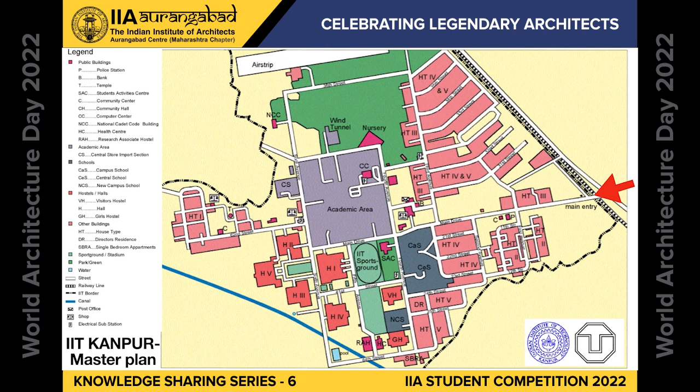In the center there is an academic area and school along with green patches. Though the residences are near the road, this has been kept separate from the academic block, as students require silence and peace in their educational domain.

The site is bifurcated into 3 sections. Purple color depicts roads, yellow hatch shows the students' accommodations and its traffic flow towards the academic area, and blue color indicates the academic staff residences. This segregation is done to create a different environment for the users of the campus.

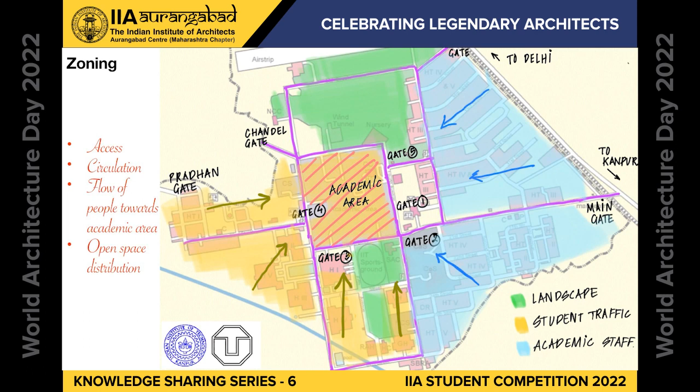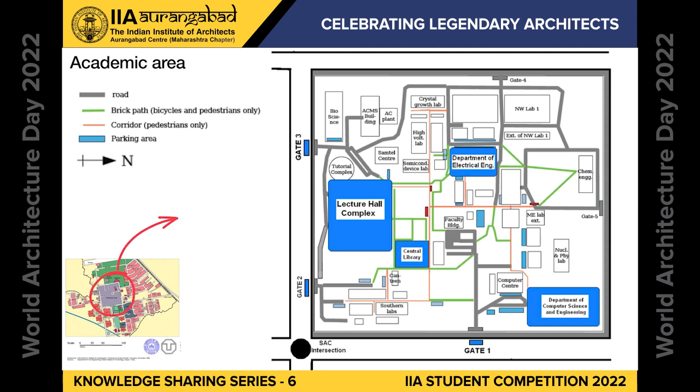This is the detail of the academic area, wherein all the different department blocks are placed diversely as per functions. You can witness the road network for cars and their parking allotment near the structures, keeping in mind the barrier-free design. The pedestrian pathways and corridors are not cut off by the roads, hence limiting threats.

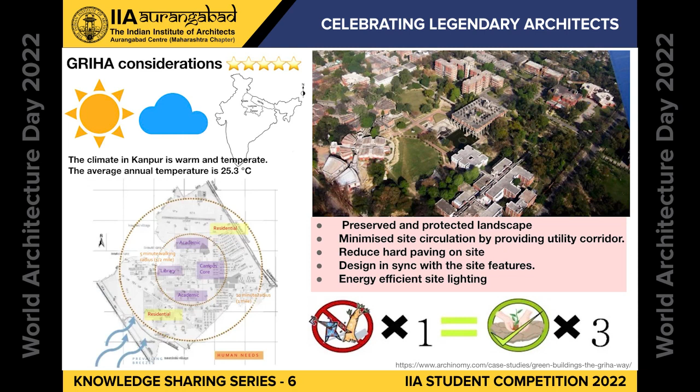The passive architecture features are followed by IIT Kanpur in the path of GRIHA. The climatic zone of Kanpur is warm and temperate. Hence, he optimized orientation and architectural design to maximize comfort by reducing hard paving on the site and minimizing site circulation to a 10-minute walking radius by providing corridors instead of exposing humans to the sun.

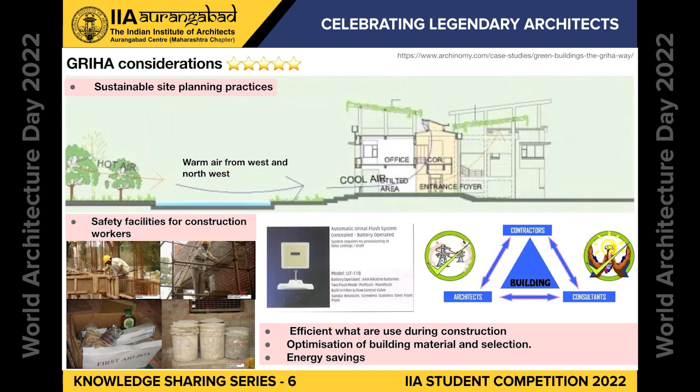He drew attention to the safety of the workers and refined material selection and openings on the building. As Kanpur's wind comes from the west and north west, the openings and water bodies are directed accordingly to lower the temperature. This cool air then passes through the internal corridor and escapes out from the ventilator, making a habitable environment. Also, energy savers are used throughout the campus, such as efficient light and sanitary fixtures.

Focus was placed on shading devices and various window openings to provide daylight engagement as per the north-south orientation of the building. Also, rainwater harvesting and soil erosion were dealt with by him, hence fulfilling the sustainability principle.

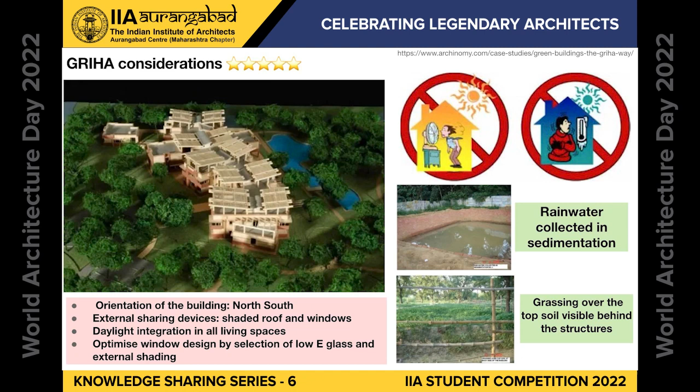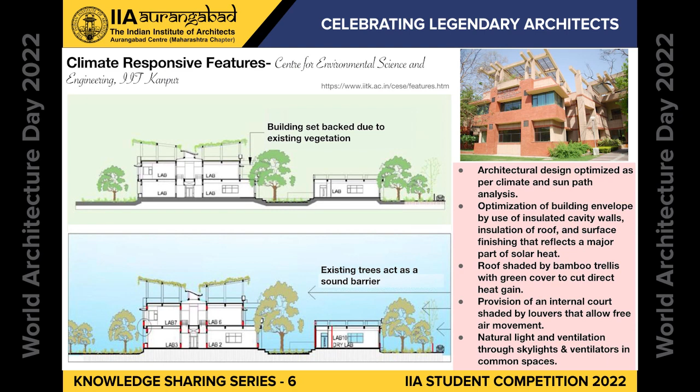As Kanvinde sir retained vegetation on the site, he incorporated the physical features into the buildings by setting back the first floor in response to the existing tree, and this tree acts as a natural sound barrier.

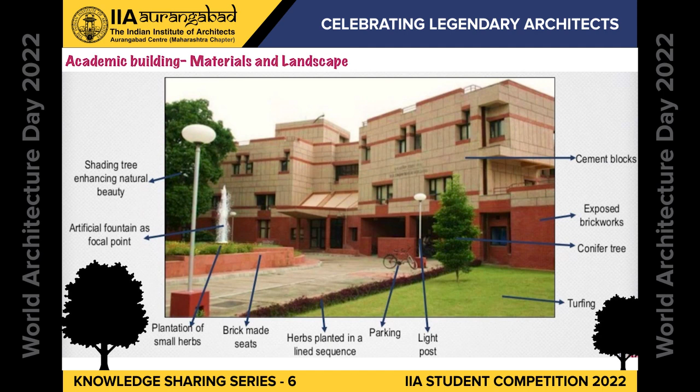He used cement and sandstone for the floors of the pavement and surrounded the pedestrian corridors with trees of high visual weight. We can demonstrate the focal point of the academic building, which is the fountain, with other landscape elements that complement the elevation of the cement blocks and exposed brickwork as materials.

The pathways are elevated and covered, connected to each floor of the departments to give an inside-out feeling to the user. To summarize the landscape details, nearly 60,000 trees are on the site, and there is a checklist of all the materials and hardscape elements used in IIT Kanpur, which include sculptures, water bodies, sitting places, etc. The takeaway points are spelled out here.

The campus has been beautifully designed with sustainable features and merges with the natural environment. The main focus of the campus is the central pedestrian island, surrounded by lush greenery and a huge water body. Efficient zoning of buildings is achieved for easy and quick circulation and for better interaction. These are the appraisals of users who visited the area, which show a 5-star rating.

Kanvinde's career spanned a period of about 50 years. The three highlighting orbits say that he advocated asymmetry, as he believed the form and space of a building should be a result of the interior space, and gave utmost importance to natural light, making sure his designs were naturally ventilated. Lastly, there is a strong presence of simplicity in facade treatment and elimination of unnecessary elements. Thank you and have a good day.

Achyut Kanvinde, a functionalist, was an Indian architect known for adding elements of brutalism to his buildings. He was a pioneer of modern architecture. His designs experimented with simple geometrical shapes that imbibed fluidity, giving the building a voice. He was born in 1916 in Achara, Maharashtra.

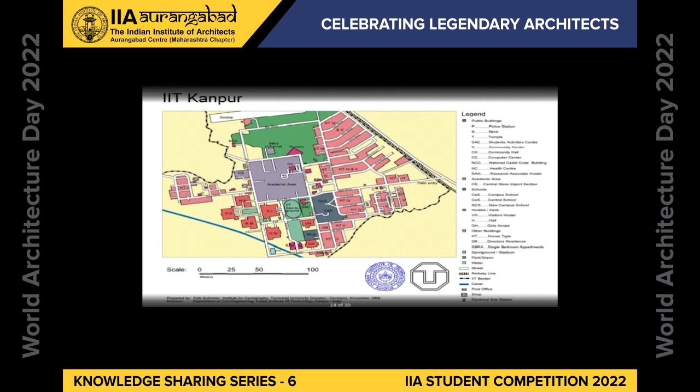The IIT Kanpur campus occupies a 1,055-acre area. The academic complex is located centrally at the site and free from traffic noise. The site is flat with a canal on one side and a transportation route on the other side.

The residential campus is planned and landscaped with the hope of environmental freedom. Halls of residence, faculty and staff houses, and community buildings surround the central academic area to provide flexibility in movement and communication, taking into consideration that research work today is a collaborative work of disciplines. The curriculum of studies is worked out with that goal in mind.

The Bauhaus influence in Kanvinde's style is clearly visible in the buildings of IIT Kanpur: cubic shapes, smooth flat plane undecorated surfaces, complete elimination of all moldings and ornament, flat roofs. This reveals the internal functions of a building as separate masses arranged in a way that was functional from inside and elegant from outside. Kanvinde strongly believed that the elevation of a structure should be defined by the functions inside.

In conclusion, his works are generally raw and unemotional, yet he managed to make his designs appealing and welcoming. His designs were distinct and unique, yet having one thing similar: functionalism. A large amount of thought was given to making them functionally efficient and practically feasible. Conventional buildings were designed as isolated islands of departments, but activities shared by students and faculty were designed to encourage meeting and interaction.

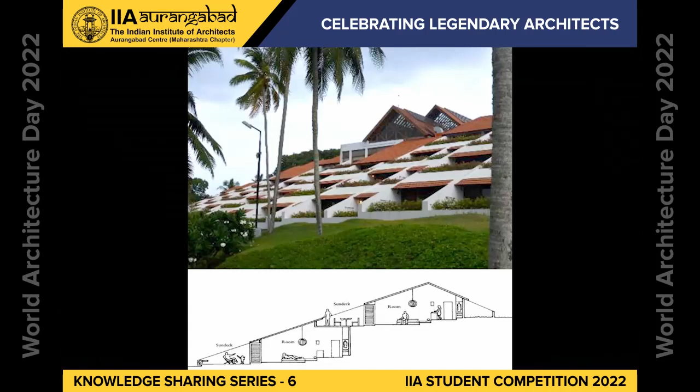Correa began his work as an urban planner in the late 1960s, designing New Bombay. Even though he was schooled in the West, he was not interested in international style and modernism.

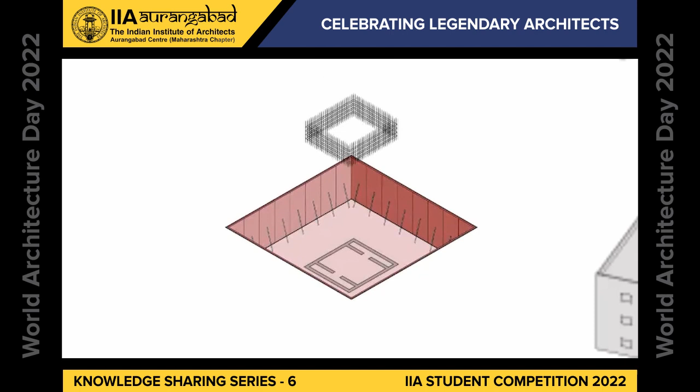Coming back to the video - by developing climatic solutions for different sites and programs, architect Charles Correa designed the Kanchenjunga apartment located in Mumbai. The Kanchenjunga apartment was a direct response to the present culture, the escalating urbanization and the climatic condition of the region. The building is a 28-story reinforced concrete structure with 6.3 meter cantilever open terraces.

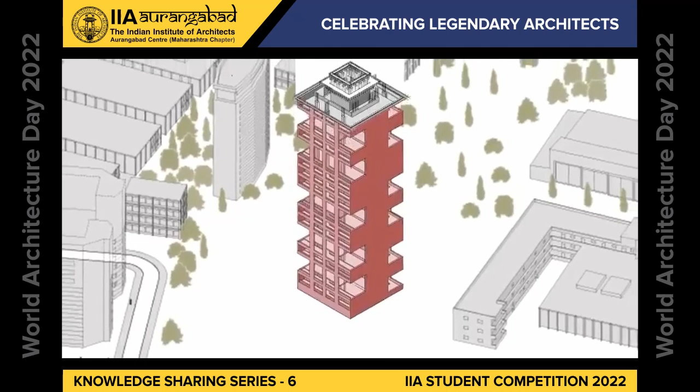In Mumbai, buildings have to be oriented east-west to catch prevailing sea breezes and to open up the best views of the city. The central core is composed of lifts and provides the main structural element for resisting lateral loads. The central core was constructed ahead of the main structure by the slip method of construction, a technique used for the first time in India for a multi-storied building.

The garden terraces of the Kanchenjunga apartment are actually a modern interpretation of a feature of the traditional Indian bungalow, the veranda. Charles Correa mainly worked on sectional displacement by bringing changes in the floor surfaces. He applied cellular planning using interlocked 1.5 story, 3 and 4 bedroom units with 2.5 story, 5 and 6 bedroom units, giving views different from one another, some an inspiration to its residents.

The stories, the silence when the city sleeps, the noise, the breeze - the Kanchenjunga apartment, rather than being just a structure, is an experience within itself.

As a student of architecture, we understand how he implemented traditional architectural elements and how we can project that in our future designs. His deep analysis of climate statistics helps us understand how to deal with climate-responsive architecture. What makes his design more special is his idea of giving open-to-sky elements in the building for reduction of heat waves entering it.

The 7 principles of Charles Correa are: open to sky spaces, incrementality, pluralism, participation, equity, and disaggregation. Highly climatic responsive buildings cater to socio-economic needs ranging from low-income, high-density housing to entire townships. He paid special attention to air ventilation to provide good human living environments.

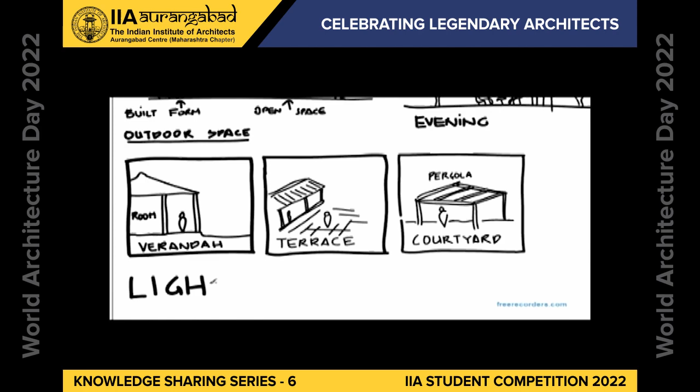Due to the high population of Mumbai, he designed low-cost houses. He designed buildings that were used by a wide variety of the public - people of different caste, religion, rich or poor.

Charles went on to create a lot of beautiful projects in his lifetime: the Inter-University Centre for Astronomy and Astrophysics, and the British Council. And not just in India, his designs crossed borders when he created buildings like the Permanent Mission to the UN in New York, the Neuroscience Center at MIT, and the Champalimaud Foundation Center in Lisbon.

In the year 1984, Charles Correa was awarded the Royal Gold Medal by RIBA, the Royal Institute of British Architects, and it was at this time that he was named India's greatest architect.

We are looking at the life and design of Charles Correa. Charles Mark Correa was born on 1st September 1930 in Secunderabad. In 1949, he decided to pursue architecture at the University of Michigan, and later his masters at MIT, the Massachusetts Institute of Technology.

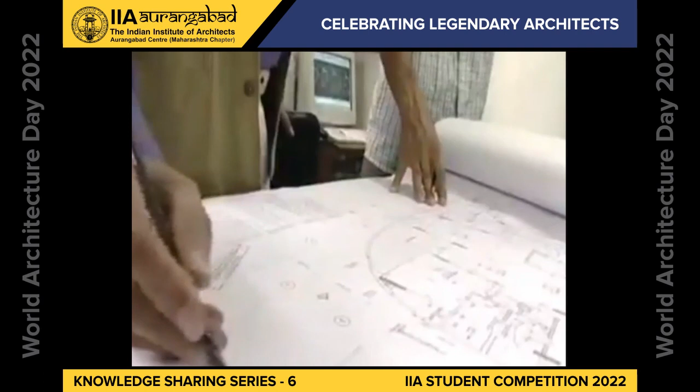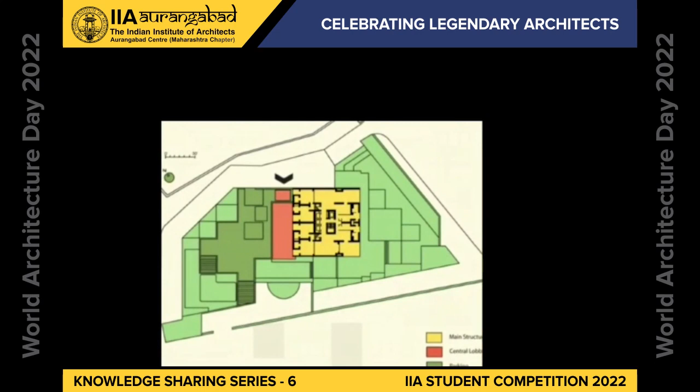The Kanchenjunga apartment is located in southwest downtown Mumbai, in an upscale suburban area. The apartment units rely on cross breezes from the nearby waterfront for cooling down the interior spaces.

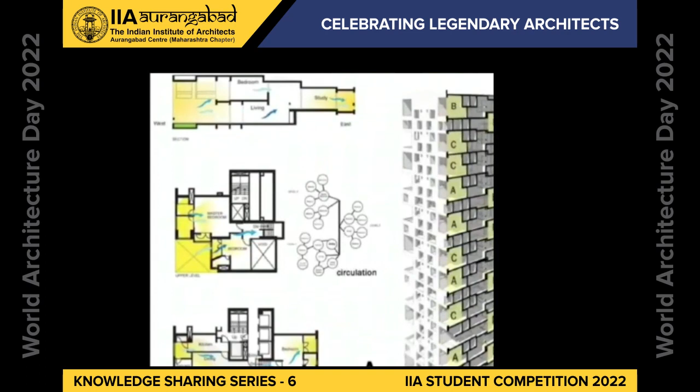It has a great deal of transparency, achieved by the use of large openings and terrace gardens on every floor. With the concrete structure and large areas of white panels, it strongly resembles modern apartment buildings in the West.

On 16th May 2018, Balkrishna Vithaldas Doshi, or B.V. Doshi, received the Pritzker Prize. At the age of 90, it served more like a lifetime award for him—the first Indian to ever receive the Pritzker Prize.

In a career spanning about seven decades, Doshi has completed more than 100 projects. The life of this man is as inspiring as his built works.

The IIM campus design reveals him as a highly original, imaginative architect, fond of architecture as he is of life and Indian values. Doshi imagined the IIM campus as a distinctive traditional Indian architecture that would effortlessly adapt to the local environment and circumstances. The idea was to represent the ethos, green and alive, of the town.

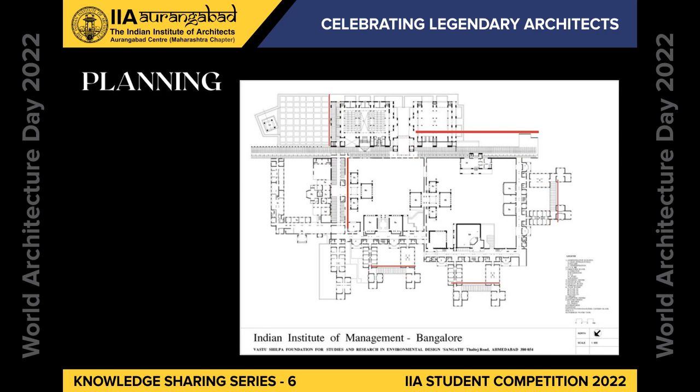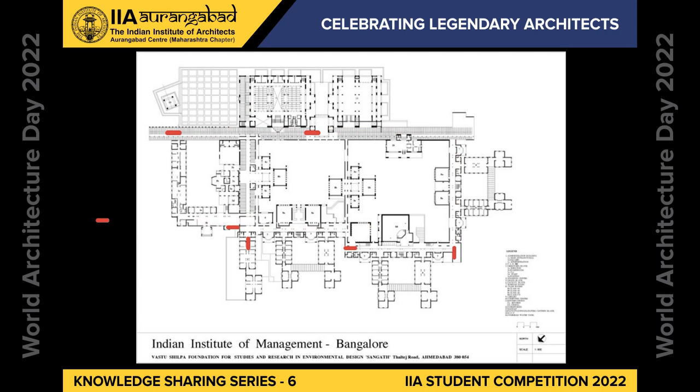One can experience a weaving of indoor and outdoor spaces with transitional spaces. The functions are organized within this orthogonal plan, punctuated with gardens, spaces for pause, spaces for chance encounters and informal nooks. Staircases connecting these corridors to lecture halls, meeting rooms and other ancillary spaces serve as transitions.

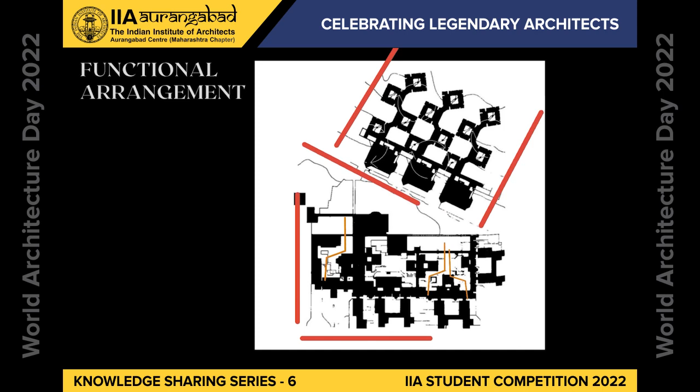The overall spatial arrangement, constructed as a polynuclear plan, relies on a series of intersecting corridors that form the fundamental skeletal framework. A pattern of outdoor and indoor spaces in plan echoes the intermingling spaces of Fatehpur Sikri, translated into a modern structural system and arrangement.

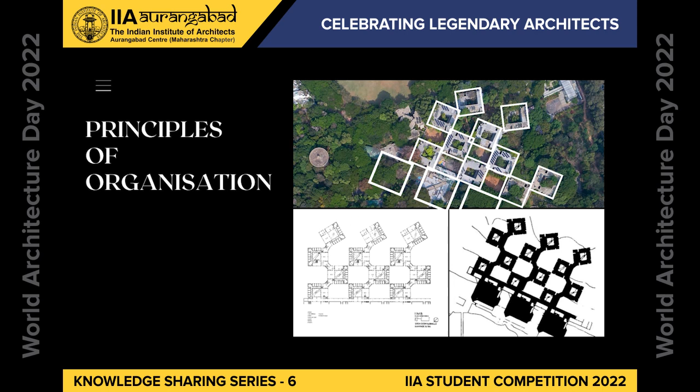The two primary materials B.V. Doshi chose for composing the structures are hand-chipped granite and concrete. The landscape's ability to interpose with the constructed form allows the building to create soft, loosely formed edges. Doshi's ingenuity enables him to manipulate light harmoniously, giving occupants and guests amazing moments.

You will never find a boring moment at the IIM complex. The design considerations throughout the campus are interactive spaces and activity for users and staff, along with the clustering and development pattern of the land.

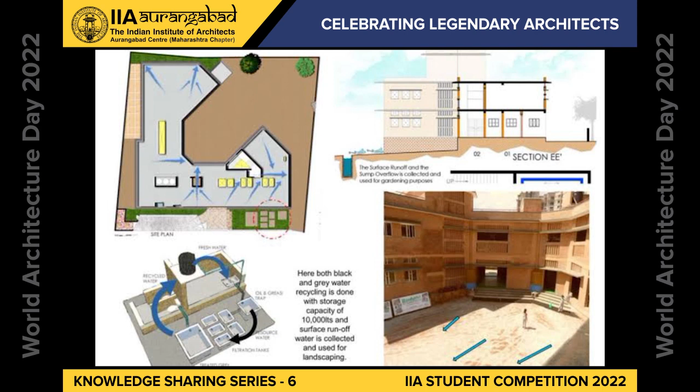Various kinds of harvesting and wastewater treatment structures were put in place, connected with the land's features. In the softer part, a larger 1 lakh liter capacity underground water tank was built, which harvests all of the rainwater from the terrace, from where it is used for cooking and drinking purposes.

The top of this underground tank forms part of the floor of the dining area. All of the water from the land is channeled, filtered and collected in another underground tank in the northeast of the land. This water is used very sparingly for some of the plants around the kindergarten wing.

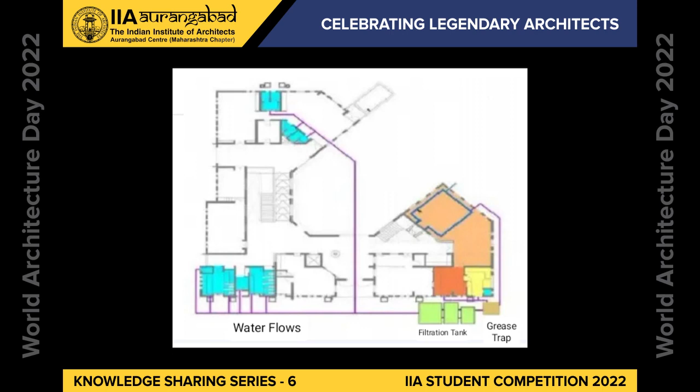The site size is close to 0.43 acres and partly rocky. It was decided that the existing rock be constructed on so as to keep the foundation cost low, as well as to leave the soft earth as a play area.

The building material used for walling is compressed earth block, and for floors and roofs, conventional RCC. CEBs were made at the site with soil sourced from the basement of a large apartment complex under construction about 5 kilometers away. This greatly reduced the material footprint.

The northeast side of the building was left open, which provided advantages in letting the morning sun into the classrooms. The building was planned such that lengthwise it faces the south and west side. This allowed having a shaded courtyard and open spaces which could facilitate outdoor activities.

This planning at the built level also helped catch the prevailing winds inside the classrooms, along with the insertion of CEB jalis at the students' body level. Introduction of jali in combination with fixed and operable steel windows brought down the cost of construction. In the first floor classrooms, skylights are provided above the blackboard, raised to allow for escape of hot air and enhance cross ventilation.

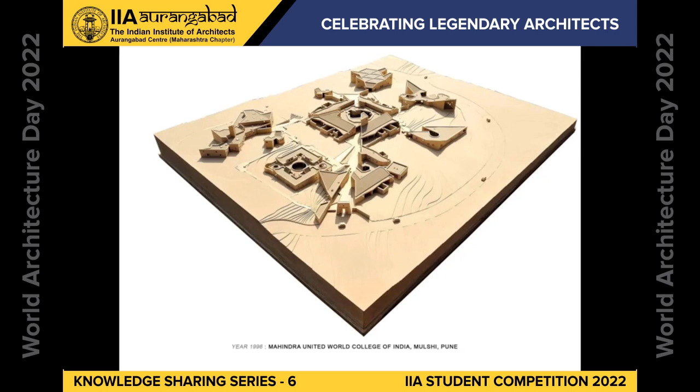The most celebrated project, Mahindra United World College in Western Sahyadri near Pune, Maharashtra. The buildings are a reflection of the mountains surrounding the campus, a kind of miniature model reflecting the jagged contours.

But they are also like a village. The architect chose to break down the scale and articulate the units as in a small town, centering the plan of this highly diverse little world around a quadrangle with passages radiating out of it.

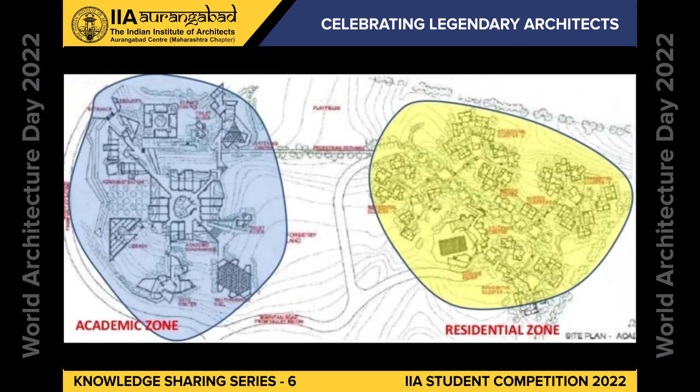The admin, science center, amphitheater, and multipurpose hall are placed along the north-south axis, while the cafeteria, library, and art center are laid out along the east-west axis, with set views for the sunrise and sunset.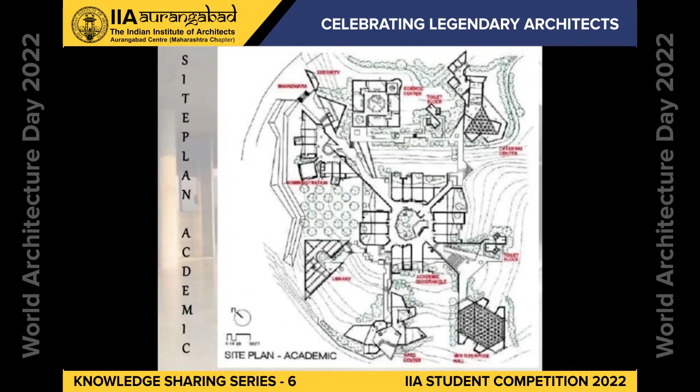A hierarchy is created in the campus plan, with the residential villages housing a central student center, medical facility, and amenities like a walking mall.

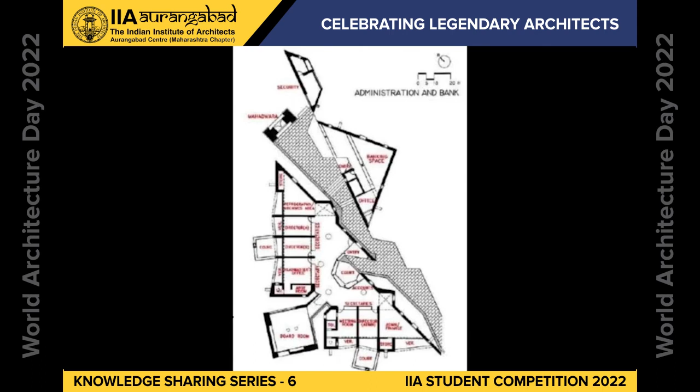In the academic quadrangle, it encircles a garden court. The quadrangle and classrooms are linked by glass doors, so each classroom is connected to its own garden or courtyard. The three corner rooms in the academic quadrangle are the facility rooms for language, mathematics, and social science respectively.

The quadrangle is linked by an encircling low covered walkway. This space is detached from the stone walls except where it connects to the classroom. The catering center has a triangular waffle slab designed to avoid columns. Verandas and service areas allow more variety in a complex angular composition, with a sloping Mangalore tiled roof and ventilation.

The philosophies of Professor Christopher that reflect in these projects suggest an alternative approach to postmodernist style in architecture, with its local use of material and exploration of regional architecture. The structure holds a strong cultural and geographical context with a progressive design approach melded between global and local language of architecture.

Learnings from Professor Christopher Benninger: curiosity should be the priority in architecture. As people who do things and make things, we should be asking many questions whose answers would temper our thoughts, ideas, and design, stressing the importance of user experience as the ultimate goal for creating a successful building. We are supposed to be designing a transforming culture, tempering the structure and nature of civilization. Our tiny gestures hold vast implications on mankind.